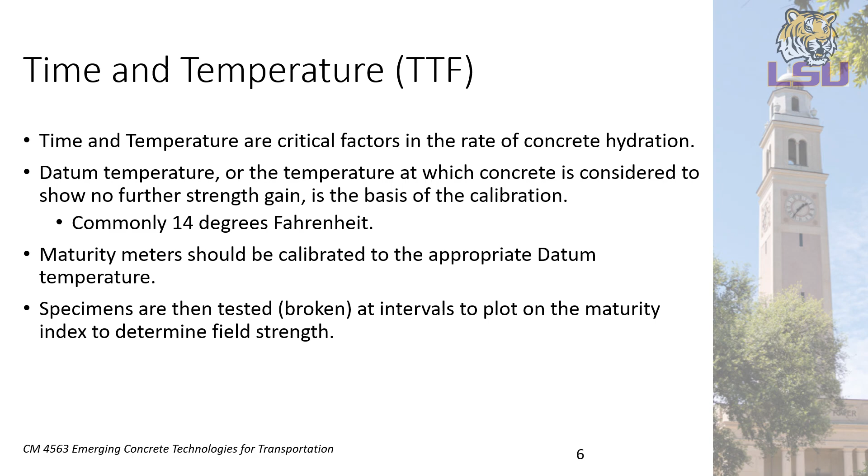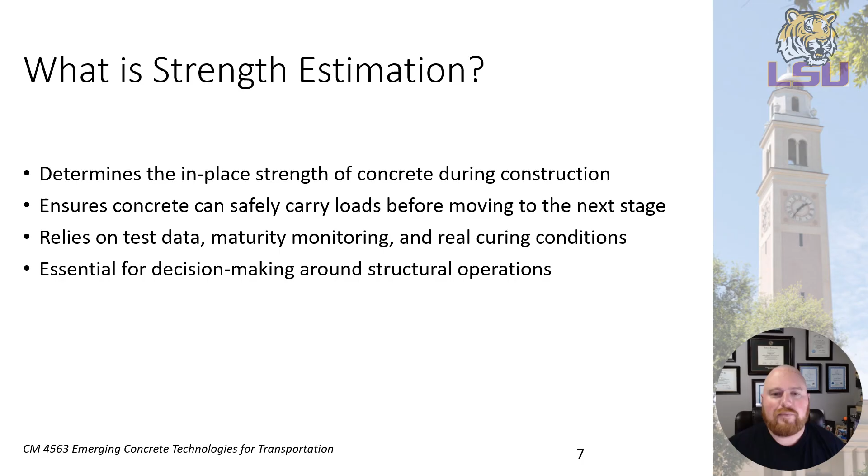Concrete strength is the governing parameter for many early stage construction operations: formwork removal, successive floor placement and construction, post-tensioning, reshoring. They all depend on achieving specified strength thresholds, which are usually defined in the project specifications. Without accurate strength estimation, either construction is delayed unnecessarily or unsafe sequencing can occur.

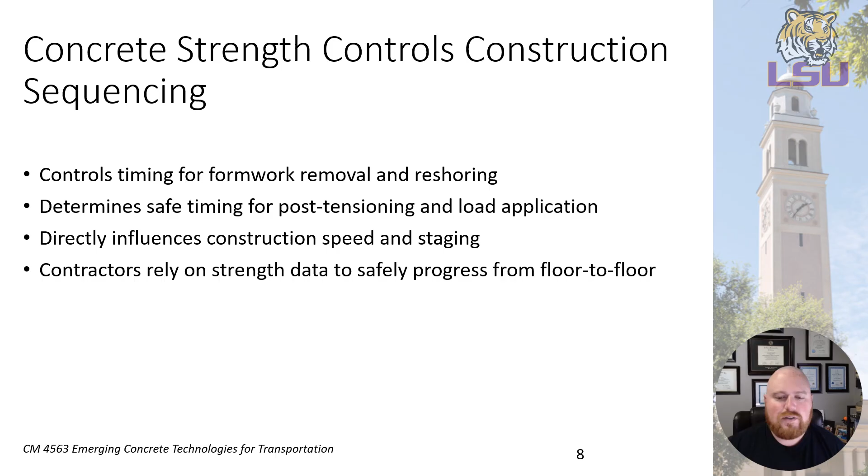Over the years, several high-profile failures have occurred because loads were placed on concrete that had not yet achieved the necessary strength. And that's why accurate strength estimation ultimately protects workers, prevents structural instability, and maintains adequate safety margins throughout the construction project.

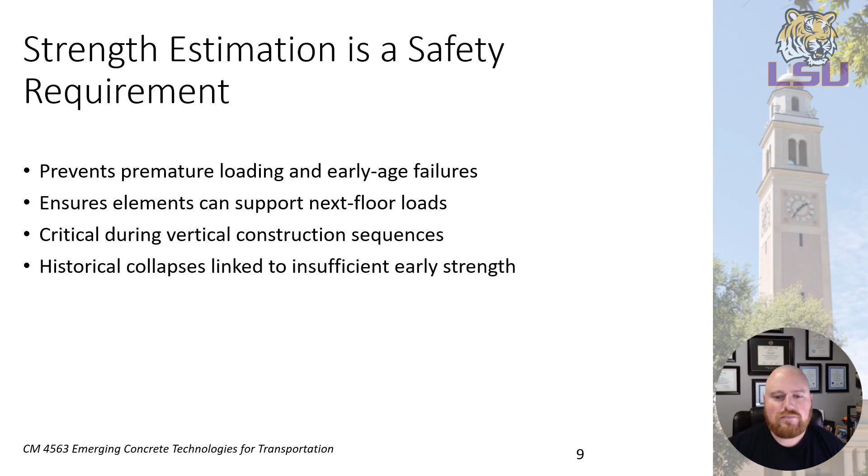One of these failures is the collapse at 2000 Commonwealth Avenue in Boston in 1971. It's a classic example of what can happen when concrete is loaded before achieving sufficient strength. The building used flat slab construction, and the roof slab around one of the columns had not developed the required compressive strength because it wasn't protected during extremely cold weather.

So at the time of failure, the concrete had only reached about 1900 to 2100 psi, which was far below the specified 3000 psi design strength and below the minimum needed before removing shoring. When the workers added fresh concrete for the mechanical room slab, along with other construction loads, including two other boilers stored on the roof, the slab just couldn't resist the punching shear forces.

So the slab, unfortunately, suddenly dropped several inches and then failed, causing a rapid progressive collapse through multiple floors. Tragically, four workers were killed and two-thirds of the structure was destroyed. So this demonstrates why accurate in-place strength estimation is really essential before loading concrete or removing its shoring.

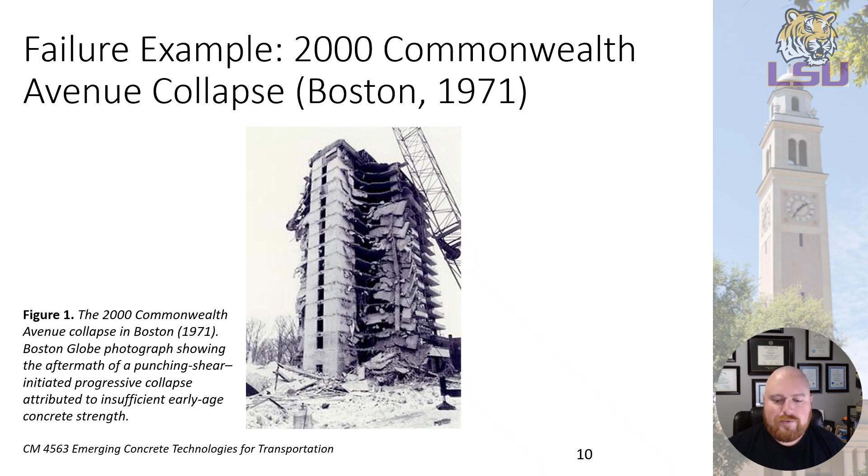Concrete compressive strength really is the cornerstone of concrete design. ACI provisions and engineering models derive other mechanical properties such as the tensile strength, flexural strength, and the modulus of elasticity from the compressive strength. Confirming the compressive strength in the field ensures the structure is achieving the minimum performance criteria assumed by the design.

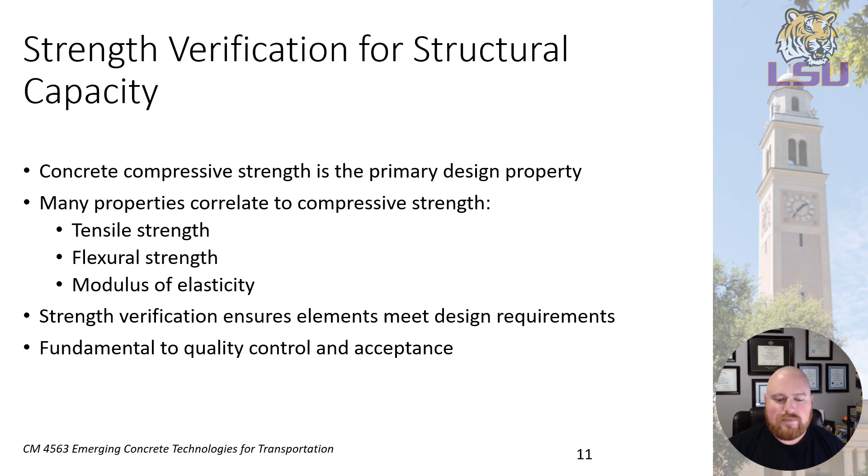Concrete strength gain is a function of hydration, which we have learned throughout this course. It is influenced by both time and temperature. Higher temperatures accelerate hydration, while cold temperatures slow it significantly. Additionally, moisture conditions and curing methods in the field impact its actual strength gain as well.

Lab cured specimens do not reflect real world curing. They are typically stored at constant temperatures and moisture levels. However, in contrast, concrete in the field undergoes daily temperature cycles, wind exposure, and inconsistent moisture, all of which affect strength gain differently. So, in other words, it's more representative of what the concrete will actually see throughout its life cycle than a specimen that's cured in the lab.

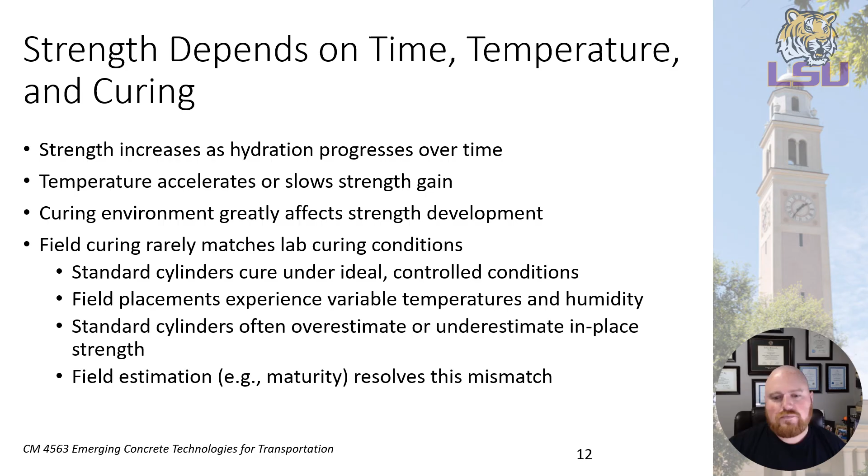Reliable strength estimation allows contractors to safely optimize their schedule. Instead of waiting fixed time intervals, real-time data enables construction to resume or continue as soon as the concrete reaches the specified required minimum strength. So all of this ultimately reduces the time lost and most importantly maintains safety on the project.